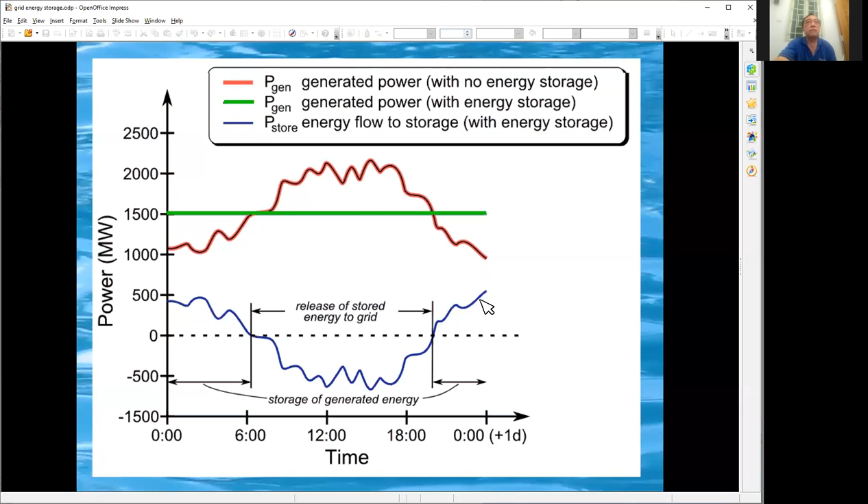And which power station wants to build one that can supply only during the peak? How to earn back the amount? People will want to earn back as much as possible in the shortest period of time. So the cheapest solution is to store the energy and then release it during the peak hour, and then store again during the night. Okay.

So one of the very common energy storage methods is pumped hydro. This one has an efficiency of, let's say, 70 to 85%. They have a storage tank, or a lake. It can be man-made, but a man-made lake is very expensive. It can be a natural lake on top of a mountain, or some lake on high ground, or some empty hole somewhere. So that will become a natural source of storage for your water.

So during the daytime, you can pump water in. Daytime means, let's say you have solar energy, then the excess solar energy you can store here. Then if you need more energy, you can release the water and run a turbine.

So if you have a low energy demand, then with the excess energy you can run your power station to pump water up to this storage tank. So it's like a dam, but it's not a dam. A dam has water coming from the sky, but this one is water you pump from the bottom, from the ground up. It can be from a sea or from a lake at the lower end.

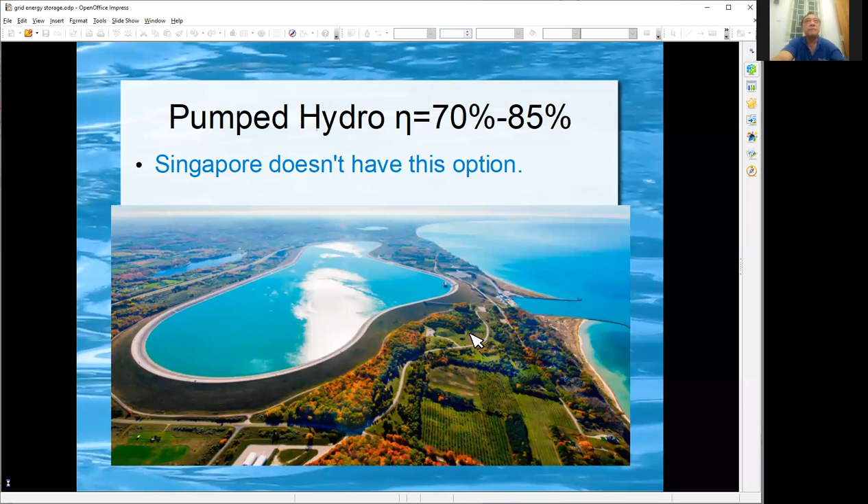Okay, Singapore doesn't have pumped hydro because we don't have a big lake. Our lakes are all on the ground near water level, like MacRitchie and Seletar. So the other option you can think of is compressed air. Okay, with compressed air, you need a huge space for this storage. If you get one cylinder, two cylinders, your compressed air will be enough for a short while only.

So in order to have more energy storage, you need a very huge space to store your air. So if you pump your compressed air into a tunnel, you have to make sure the tunnel has no leak. If you pump the air in one side of the tunnel and the air comes out naturally from the other end of the tunnel, then it's useless. So you have to check and seal up the tunnel, make sure it is sealed.

Of course, you don't have to worry that the tunnel will explode because you pump too much air and the whole mountain will just explode like a balloon. Because the mountain is so big and so heavy, it's not likely that your air pressure will be large enough to explode the mountain. But if you are storing air inside a storage tank, then if you pump too much pressure into the tank, it can explode. So when a tank explodes with compressed air, it's very dangerous.

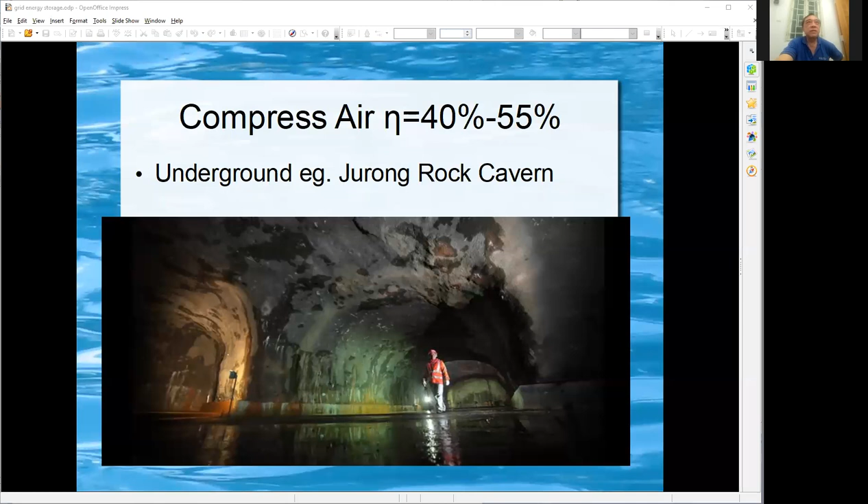A very common grid storage is batteries. This very famous one is the Tesla installed in South Australia, with 100 megawatt hour capacity. So in times of peak demand, or suddenly there's a high demand, the battery can supply the power instantaneously. So this will smoothen out the curve, because if you have a gas station or an oil generator, when somebody suddenly switches on a high power device, your generator cannot power up immediately. It will take time to rev up the revolution, or pump in the oil to power up.

And our power is also AC. AC power is not like DC. You cannot make the generator run faster or the frequency gets changed. You must maintain it at 50 hertz, so it must be 50 cycles per second. So all you need is to add more power. If the demand is high, the generator will not turn. Then you have to pump in more oil or more gas to force the generator to turn. Otherwise, it gets slower and slower.

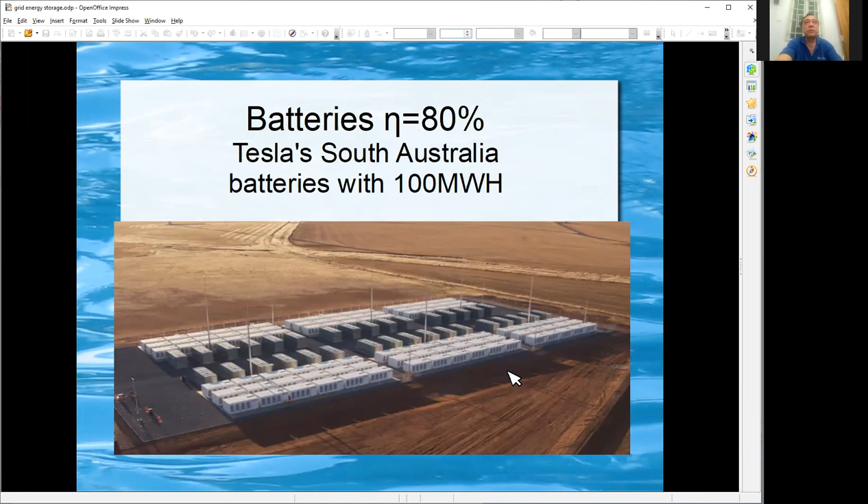But batteries don't have this issue. Batteries with electronics can quickly fill up the energy demand difference, so you get a very perfect demand and supply. Now, of course, the cost is very high. When we talk about batteries, we can talk about car batteries. This is an idea that has been floating around. If you consider each car has 30 kilowatt hours of battery storage, and you have 10,000 cars, you have 300 megawatt hours. So if all these cars are plugged into the grid, you can literally have one large battery like the one in South Australia.

But of course, if you want the car to take part, you've got to pay for the car battery usage. If the fellow tops up his battery from the grid, he's got to pay for the energy. And when he supplies the energy back to the grid, you've got to pay him back, and of course he must earn some money. Otherwise, if he takes from the grid at, let's say, 20 cents, and you pay him 15 cents, he loses money. What for? He contributes to your grid. If you pay him 20 cents, he doesn't make money. And charging and discharging repeatedly can shorten the battery life. So of course he will want to be compensated more for using his car battery to power the grid. How they are paid? So far, a few people talk about it, but it's not very well implemented.

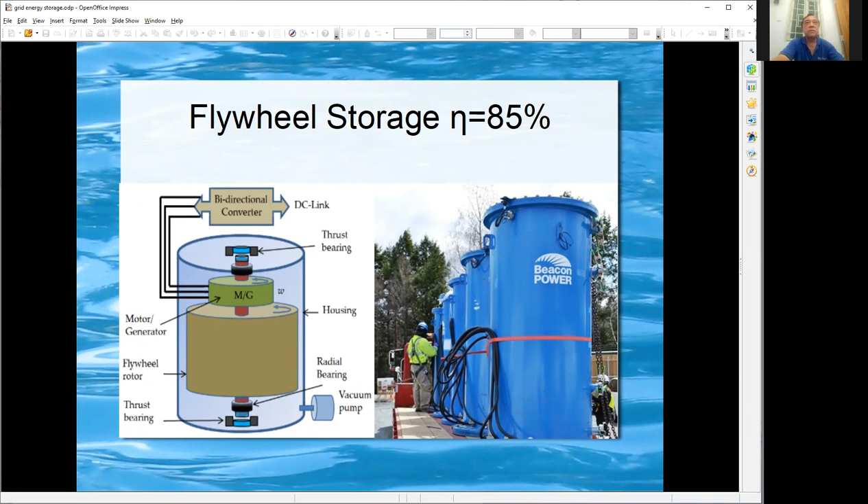So those are technical issues. But flywheel is one of the options people can consider because it does not occupy a lot of space, and it can last much longer than batteries. Because with chemical batteries, after a while, the chemical will be corrupted or diluted, and you won't be able to have as much energy in the battery as when it was new.

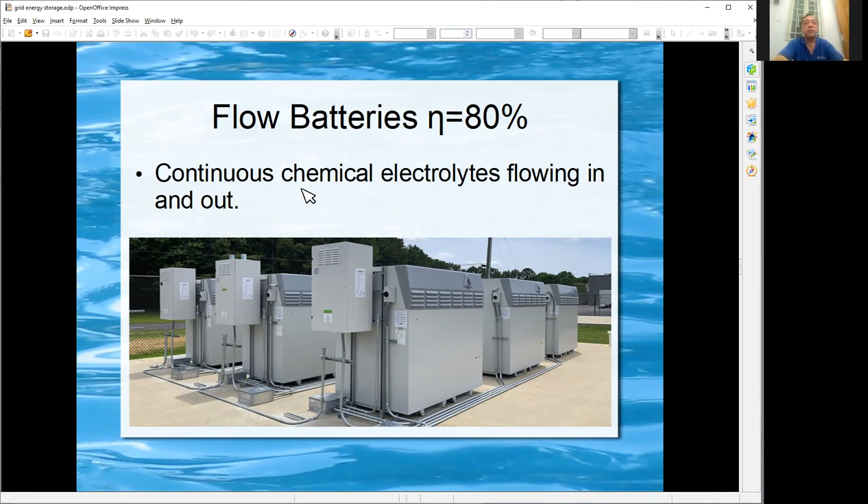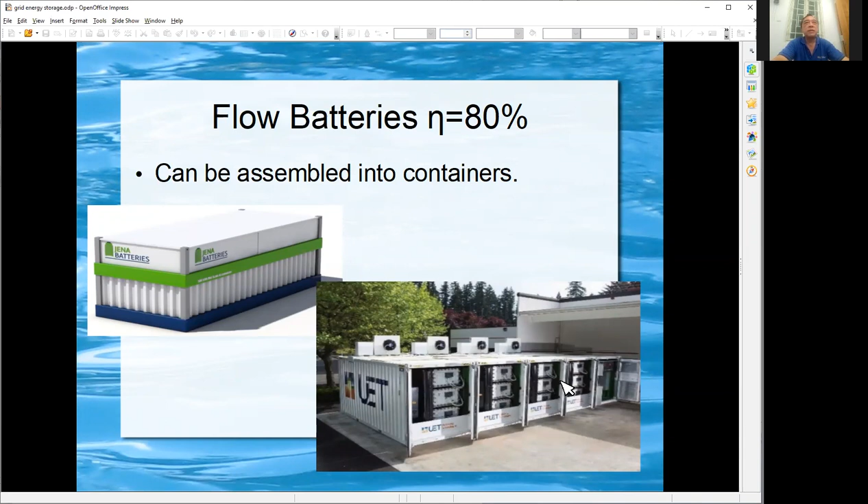The other way of storage in batteries is called a flow battery. This one is similar, about 80%. They have a continuous chemical electrolyte flowing in and out. All the used electrolyte is taken out, new electrolyte comes in. So as long as you keep replenishing the electrolytes, your battery will be as good as new. You can even pack them in a container; if you open it up, these are modules, everything is inside. So you can ship it out easily in containers.

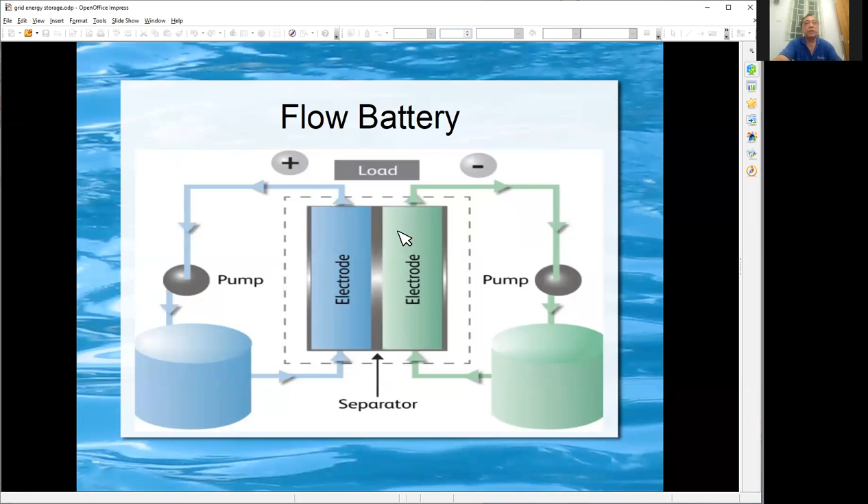Okay, basically how it works is you have a pump here, one pump there, one electrolyte out, in, and then the same thing. So it's just like replenishing the chemical inside a battery. Once charging, you pump the reverse way, so the electrolyte chemical reaction is reversible.

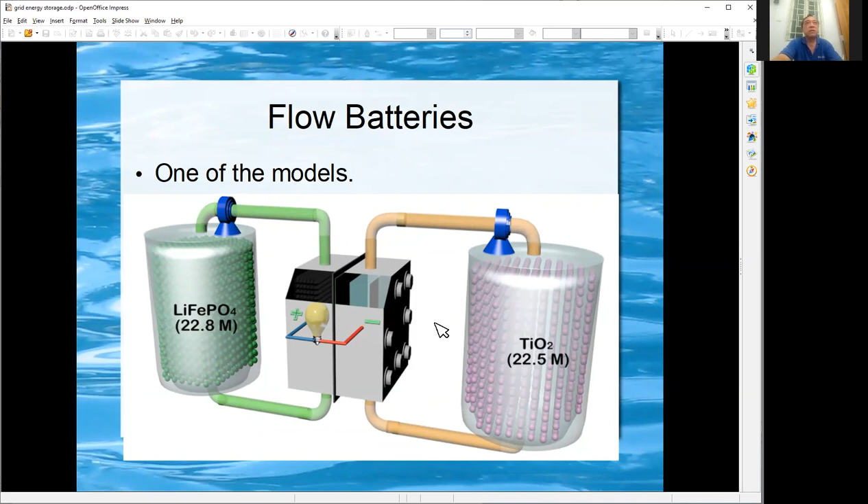Okay, this is another one of the models. There are many models using different types of chemicals under research to see which one is easier to manage, cheaper, safer, and every other reason. All these electrolytes have to be tested for corrosion, stability of the chemical, how long the battery can last, and many things.

Okay, the other one is a liquid metal battery, which I've already mentioned. So far, there's a lot of talk, but this one is not implemented everywhere yet. Maybe it's still under research. They have some production, very small scale production, and it's not cheap at the moment.

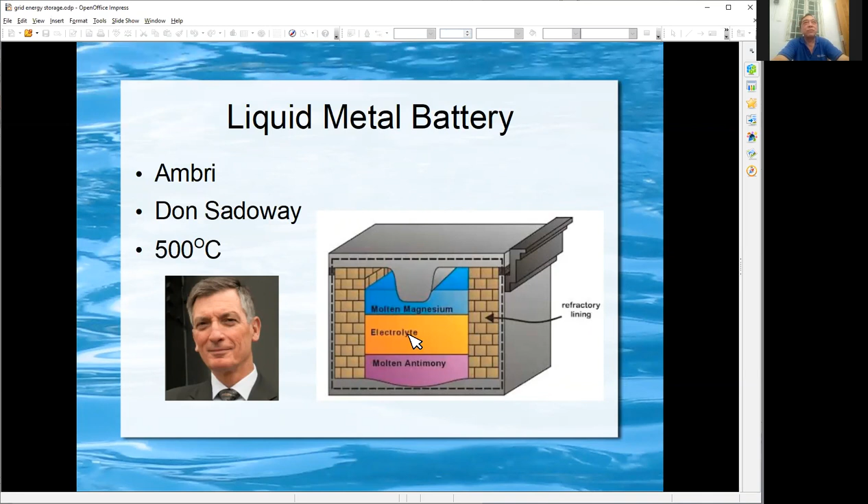And once the temperature drops too low, everything becomes a solid. Once it's a solid, you cannot operate it as a battery, and it's very safe to transport it at room temperature because it's solid. It's not a battery. You will not get a short circuit or it will not explode.

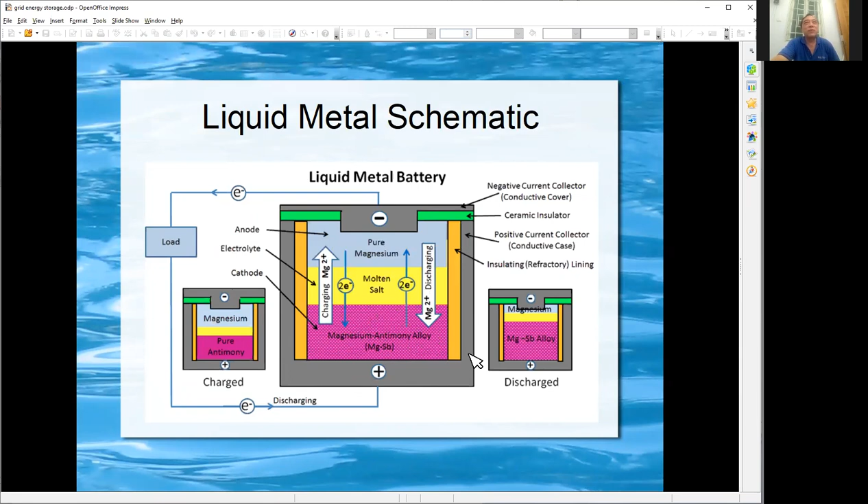Okay, for example, in detail, you can slowly look at it and analyze this thing. Charging, discharging. So it's the molten salt. Charging, the magnesium goes up. Discharging, the magnesium goes down. So you go up and down, up and down. So of course you cannot charge until nothing is left. Then it won't work anymore. So there's some control to prevent you from exceeding. They can also put many modules together into a container, and then they can ship the whole container.

Of course, operation-wise, it's the high temperature that some people find not so nice. But the temperature is not an issue because it is very well insulated. You can touch it, you won't get burned. And then as the battery runs day and night, charge, discharge, the temperature will remain there. So it won't cool down.

And it is good, because a lot of other batteries, when it's too hot, you must stop using. You cannot use the battery because when it's too hot, the battery will burn, just like your phone battery. If it's too hot, it has to shut down. Otherwise, it will catch fire. So for this type of battery, the hotter the better. So they are not so afraid that the battery becomes hot. They like it hot.

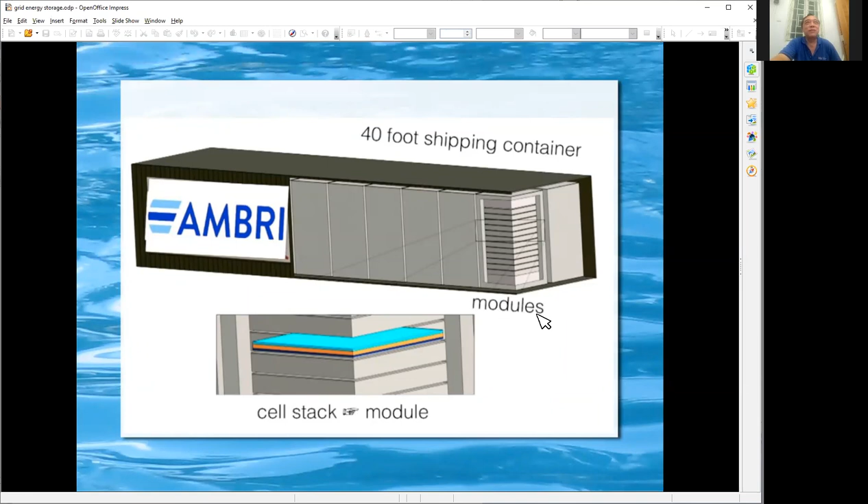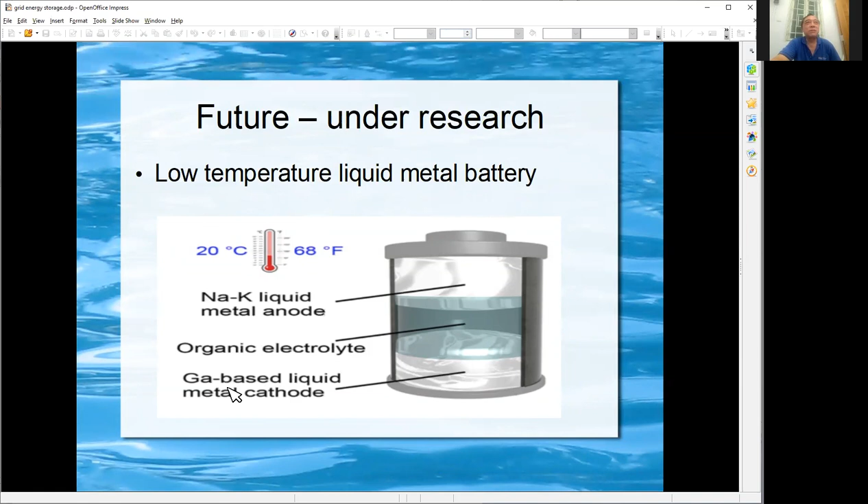So under research, they're talking about low temperature liquid metal batteries, such as room temperature, using some materials like gallium and all these things.

The other storage that you can consider is liquid nitrogen storage. Nitrogen is a gas, like the air. The air is 78% nitrogen. So you can compress the air and then you get basically oxygen and nitrogen with other gases. If you are not so particular about pure oxygen or pure nitrogen, then it is okay, because for energy storage, you don't care so much whether it's pure nitrogen or not.

And this type of compression technology is there already. So you can just buy this type of compressor, this type of big cylinder, then just pump in the liquid nitrogen, and then you can store it up. So you can store a lot of energy in a small space. If you need to scale up, you can just get another cylinder, cool down the air into liquid, and store it. So some call it liquid air, or you can call it liquid nitrogen. Compression and cooling are all very mature technologies.

And when you do compression, one side is cold, which is what you want, to freeze it, but the other side is hot. Just like a refrigerator, inside the fridge is cold, but outside the fridge, those fins at the back are hot. Same with an air conditioner: cold inside your room, hot air outside. So the heat is a byproduct; if you can use it, maybe to heat water.

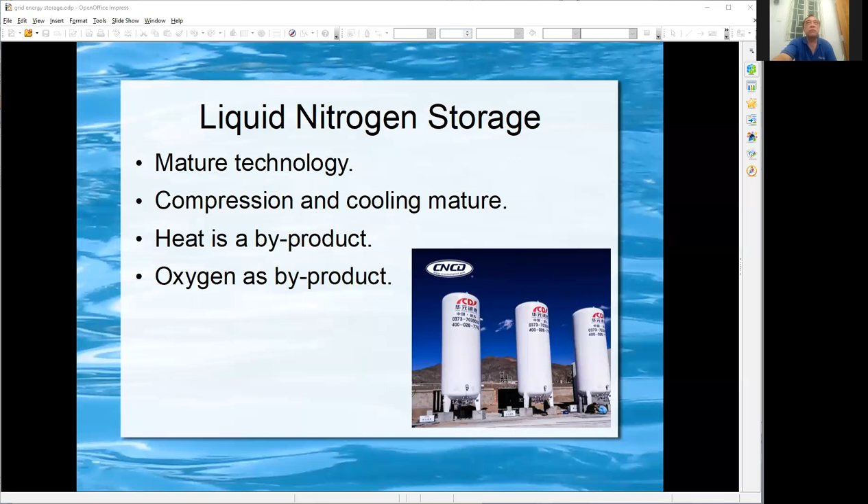Okay, so liquid nitrogen, when you want to use it to generate electricity, you just need to heat it up. If you expose it to air, then it will absorb heat from the air, and then it will expand. The liquid will expand and become gas. It will become gaseous, and it will expand. The volume will increase, and that will be enough to power your motor.

Of course, you can supply heat, then the expansion will be more. But when you supply heat, you are actually consuming more energy. Of course, the heat can be supplied from your own, because when you compress the nitrogen, you have the heat. So this heat, if you store it, you can use the heat to heat up this nitrogen liquid to get gas. You also can get more energy out of it.

Okay, and then you can also use, let's say, ambient air to heat up the liquid nitrogen, and then the resulting cold air can be used for cooling, either for refrigeration or for building air conditioning, which is quite a useful byproduct. Because when you expand, the byproduct is cool air. So this cool air can be used to cool our offices or maybe our cars and so on.

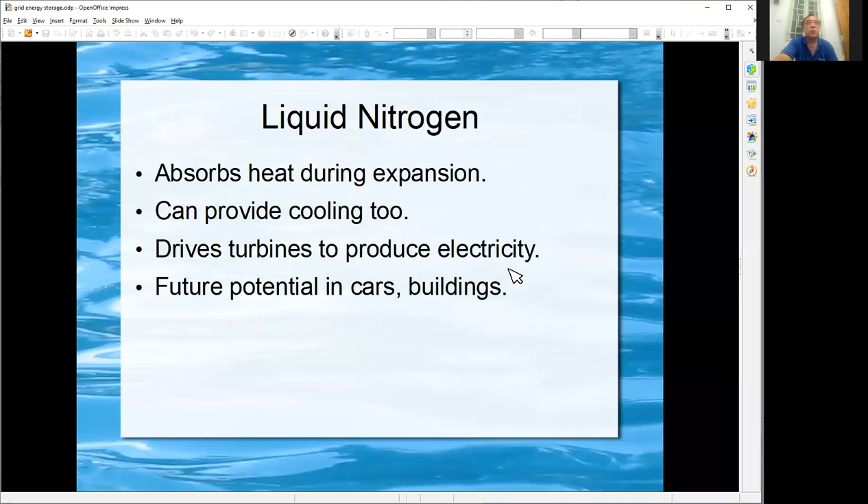The other one is molten salt. You can store your energy in molten salt. That means you heat it up to melt salt. Salt can be table salt, sodium chloride, or any other salt. Salt means it's a chemical compound. And of course, you have to be careful of corrosion, because salt can corrode metal and so on. So you cannot use plastic to hold molten salt because it's very hot.

So during high demand, you can use the salt to boil water, and from the boiled water, you get steam. The steam can be used to drive the turbine to produce electricity. This type occupies very little space. So, for example, in the daytime, you can store the energy from the solar in the salt. This can be energy from the sun directly hitting the salt to melt it, and then you can store it.

Or energy from the sun, and then you drive a heater from solar, or energy from electricity, or whatever excess energy that comes from somewhere, you just heat it. It's just a way to store energy as heat. And when demand is high, then you can use this heat to boil water to drive a turbine and produce electricity. So this is one way of storage.

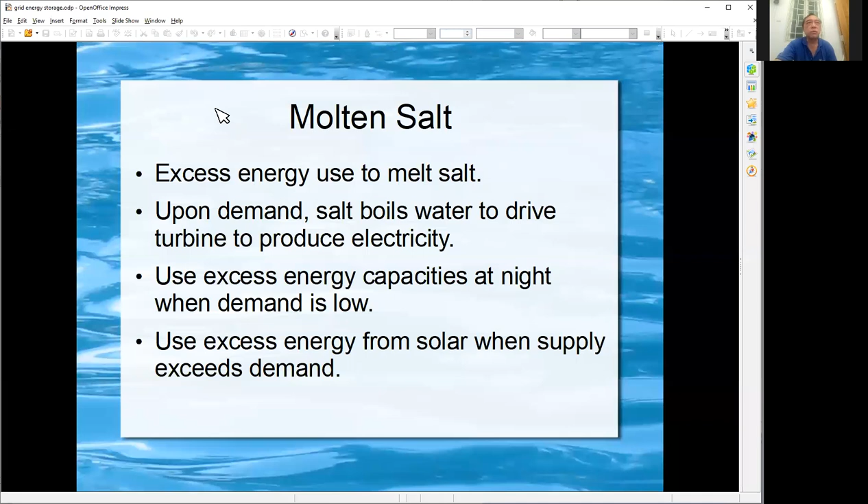Okay, the other storage a lot of people talk about is gravity storage. Gravity storage must be very huge, very, very big, and very, very heavy. And all these are concepts only. So far, I haven't seen any real implementation. In this case, when you have excess energy, you pump water in, and then you raise the whole cylinder up. Because there's energy, there's pressure. As you pump water in, this whole thing will be raised.

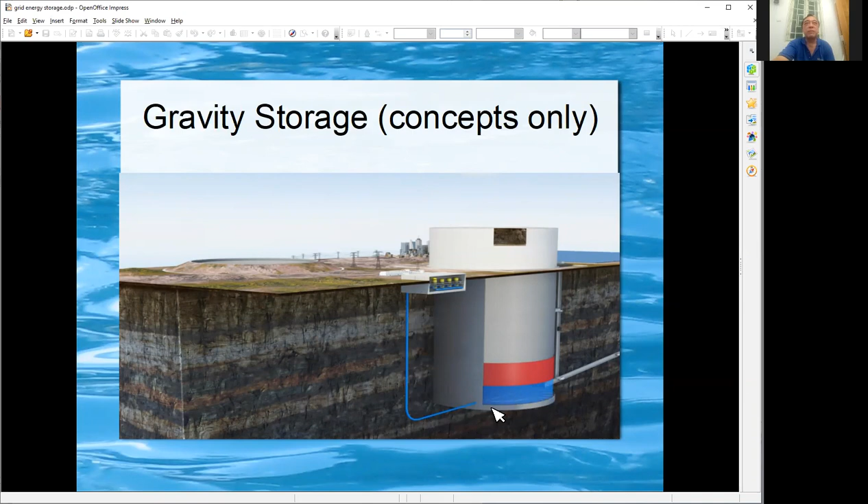So when you want electricity, you just release the valve, and then the water flows backwards, and then you can drive your turbine. This is for this pipe. Whichever way it goes in or out, it doesn't matter, because water pressure is the same. So you can have only one valve, pump in, pump out, or other construction. But that one is very huge.

The other one, there is a small prototype. They use heavy concrete blocks, each one like 30 tons. So they lift it up and then position it. Then when you need the energy, you just release it, lift it up, and then release it to the floor. As you release it, the energy will be given off.

The gravitational potential energy will be converted to electrical energy. Okay, but if you look at it, if somebody just picks one block out, then the whole thing will topple already. But of course, it's not so easy because each one is many tons, like 30 tons. So it's not easy for one person, like a toy, to just take the bottom piece and then everything collapses. It won't happen.

But this type of thing is also very dangerous. You won't want to be under this, because if the placement is not accurate, or there's a stress in the structure and then one part collapses, then the entire piece collapses and if you are at the bottom, you'll be dead. Flat meat.

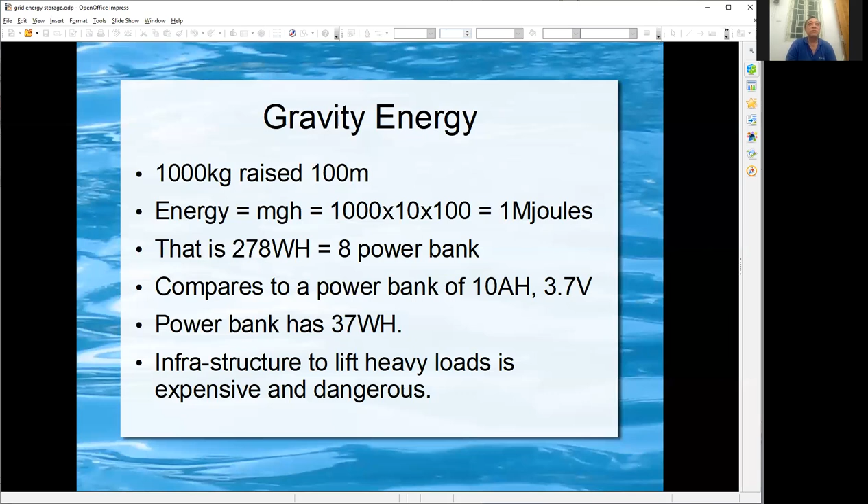If you calculate 1 battery power bank, 10 ampere hour at 3.7 volt, it gives you 37 watt hour. So it's roughly about 7.5, 8 power banks. So in my opinion, gravity energy is quite useless. A lot of people talk about it, it looks impressive, but I don't think it will work. And it's too heavy. You don't even want your building to be next to it. In case it collapses, then your building is also gone, because these are very heavy blocks, tons of it.

And so what's so important about grid storage? Because first, it's very expensive to double, let's say, the number of power stations. If your peak demand is double the average energy, then you've got to double the number of power stations in order to cater to the peak demand. Yeah, I think you probably understand what I mean.

See, just like if you want to conduct a class, sometimes the demand is high, sometimes demand is low. If sometimes you have 100 people, and sometimes you got 10 people, but you want to cater to everybody, then you must have a lecture room that caters to 100 people. So when there's 98, you still can take it. If there's 101, then one person cannot come in. So there will be insufficient energy for one more person.

But if you have 50 or you have 10 most of the time, then your 100 capacity lecture room will be underutilized. So if you are paying for it, would you want to pay for 100 capacity or just maybe 20 capacity, and save the excess money? And those who cannot turn up, just tell them sorry. I mean, your savings on the rental for the lecture space may be more profitable than the extra income from catering for maximum capacity.

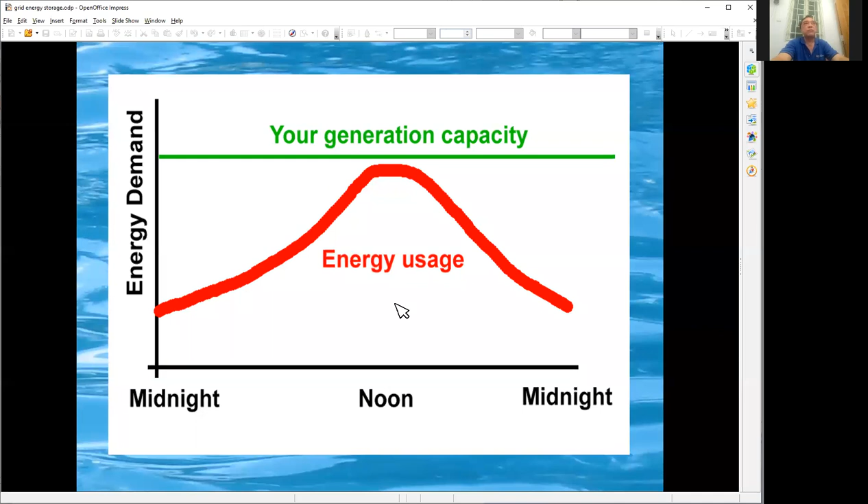So here we show some example. This is your generation capacity. You can produce so much power. Your generator constantly produces so much power, no problem. And then the energy usage, it goes low at night, daytime goes high and so on. This is just arbitrary. Okay, so a demand like that.

And then what happens if you have solar energy coming? So you produce solar energy in the day. So you find that for your power generation, to meet the demand, you have to generate the power all by yourself. And then when the sun comes out, you can afford to lower your production. So you find that you have excess capacity to cater for the peak period. Of course, when the sun doesn't shine, then your demand will go up. But this curve will more or less flatten.

So initially it appears to be a good sign, because you suddenly find that you don't need to build another power station, because the solar energy actually came in to flatten your peak demand curve. Okay, but what if more and more solar energy comes in? Your solar energy almost meets your demand already, and then you find that you become unwanted during the day. Nobody wants your energy, because your energy from gas or oil is expensive, so people don't buy from you. I get it from solar energy, it's cheaper.

Or a lot of companies, they install solar energy on their rooftop. If you go to all those companies, they have very big rooftops, and some have a very big land area for their car park. So all those areas they can install solar energy. And if every one of these factories' solar energy keeps going up, then the demand for electricity during the day keeps falling, and you come to a point when you are over capacity already. During the day, you are actually unwanted.

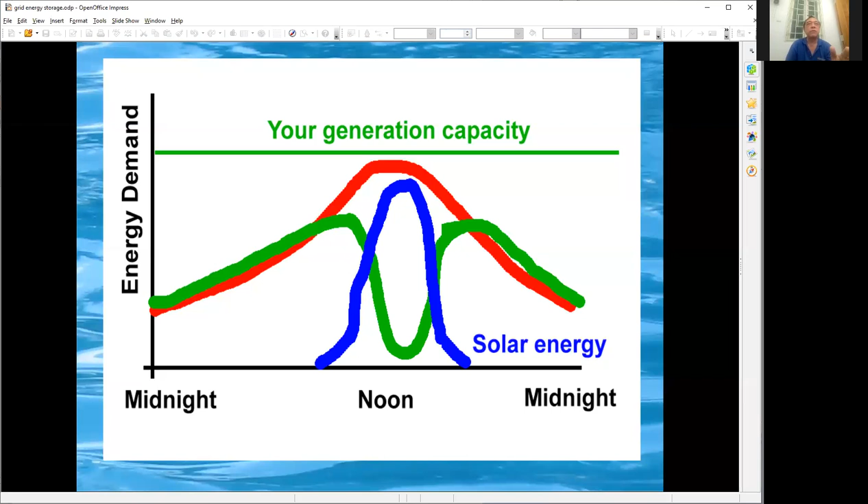Okay, so here in conclusion, we would like to say that power stations will lose money, because this solar energy is disrupting their formula already, and they are not operating in continuous generation. Means sometimes higher, sometimes lower, and this is not very good for their business. When there's no sun, you ask the power station, hey, supply me the power now, I need the power now. He said, wait, half an hour. Then in half an hour the sun comes already. Then, no, I don't need it already. Then okay, you wait, I need time to slow down. So you have all these problems.

So you need instant response to sudden peak demand and so on. So battery is one of the solutions, and it is one of the most expensive solutions. And battery has a lifespan. So now it's how the government is going to handle all this power, which will mean whether in the near future you get brownout or blackout, or you get nice power. If your country has poor power management, then businesses may not want to come here, because when they do some work and there's a power failure, or you type a long letter and suddenly power failure, then you lose your content, or your computer shuts down suddenly and you get lost clusters. So then people will start having their own uninterruptible power supply, and everybody will install batteries in their own office and put UPS. So you get into all sorts of problems.